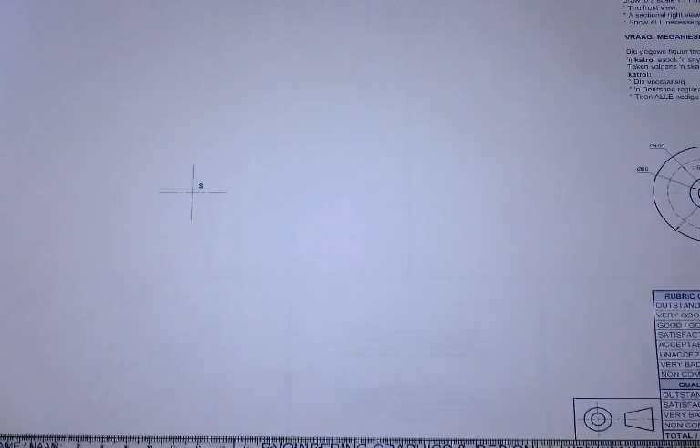Okay, so I'm going to take my compass and I'm going to look at... I just want to fit it so that you can just see my view here. I'm going to start with my front view first.

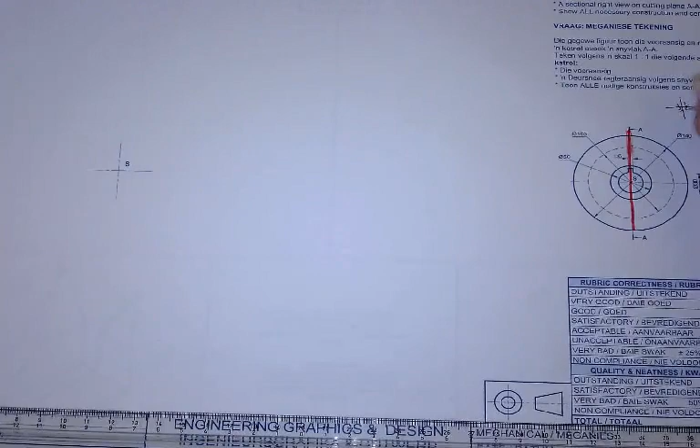So now, remember this is third angle. So when I look at third angle here, I have 1, 2, 3, 4 blocks. Front view is in the third block because it's called third angle. And then right is on the right, left is on the left. Okay?

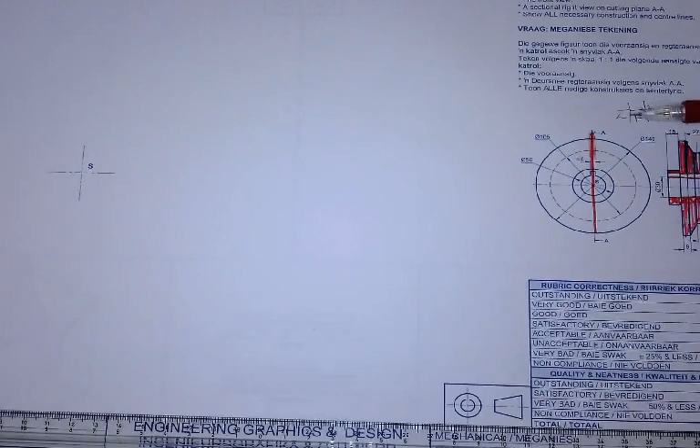When I have the front view here in my third block, this is my front view, okay, because they say a front and a right view. This view cannot be my front view because then that would have been a left view. Do you guys understand that? Okay, so please look at how you analyze your two different views so that you know which view is what.

So we are going to start off with this drawing, and now they say it's scale 1 to 1, but remember they are giving us diameters. So we have to halve those diameters to get the actual diameter when we draw it, because our compass draws in radii. So I'm looking firstly at this diameter here, because I'm looking at the arrow from there to there.

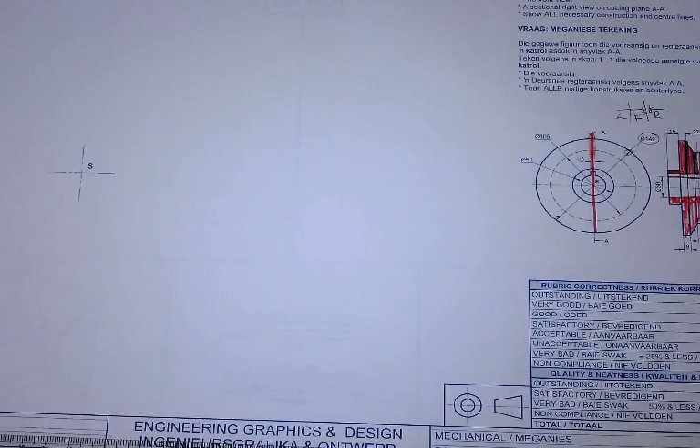Okay, so that's 140, so I'm going to set my compass on 70, which is half of 140. Set it on 70. Set it on S, because if you look at this view, S is right in the middle there, okay? So this S and that S is the same thing.

Okay, I'm not drawing here. Okay, hold on. Let me just zoom out a little bit more. Okay, there we go. That's better.

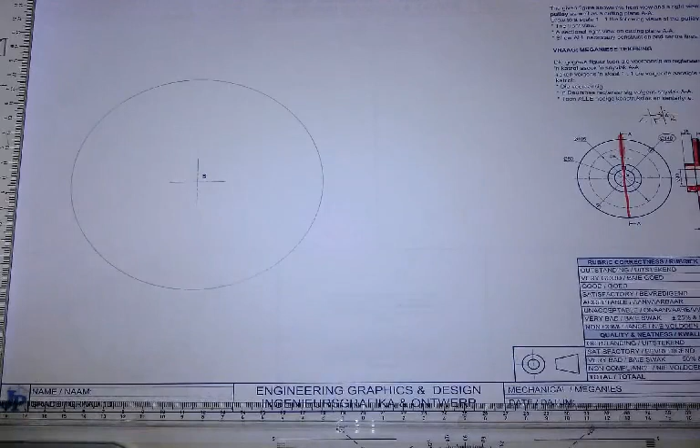And because this is a front view, I'm going to draw this in solid, because I can see that that line is solid. Then I go to my next circle, which is my hidden detail for this level of my pulley. Because when I project this across, I can see that these two align.

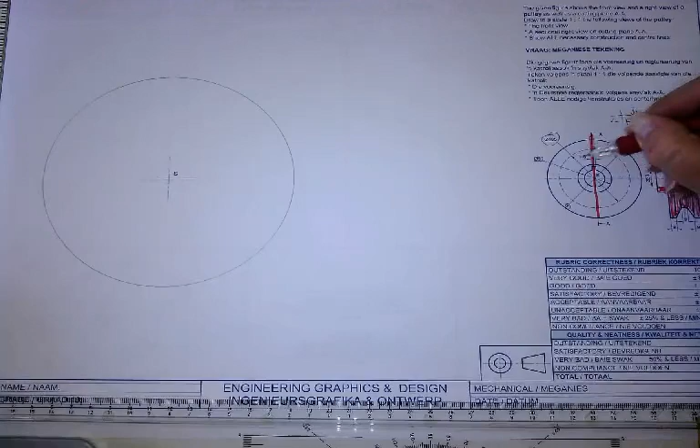So I'm teaching you now how to analyze your drawings as well. So I'm looking at that now, and this will be my 105. Okay, so what do we set our compass on? 52.5, hey? And remember, we can do half a mil.

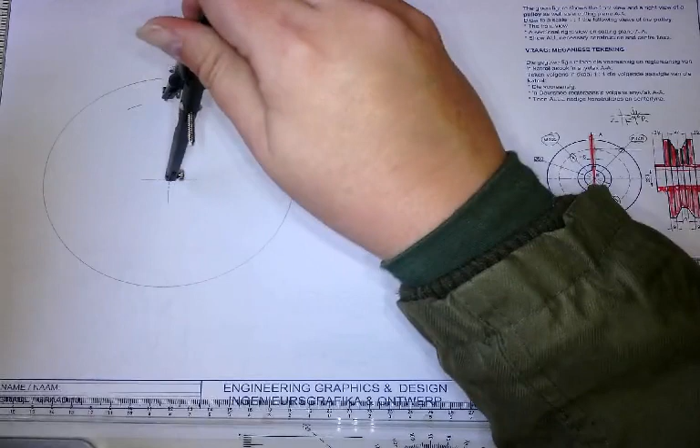Now you have two options on how to draw this. You can go like this, okay? Or you can draw a full circle and then erase in between, eh? Same thing, different story. Yes? You're fine.

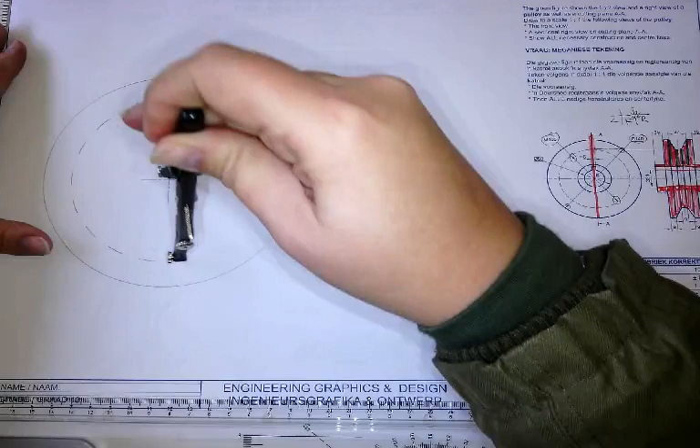Okay, so there's my hidden detail, all done, okay? And it stays hidden detail because it's hidden detail here on my view.

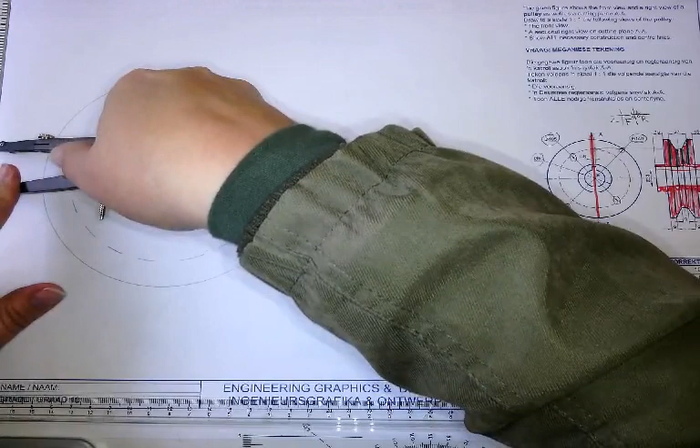Then I go to my inner circle, here, this one, it is 50. So I'm going to set my compass on 25. And please try and place your compass always in the same hole that you pricked on the middle, né?

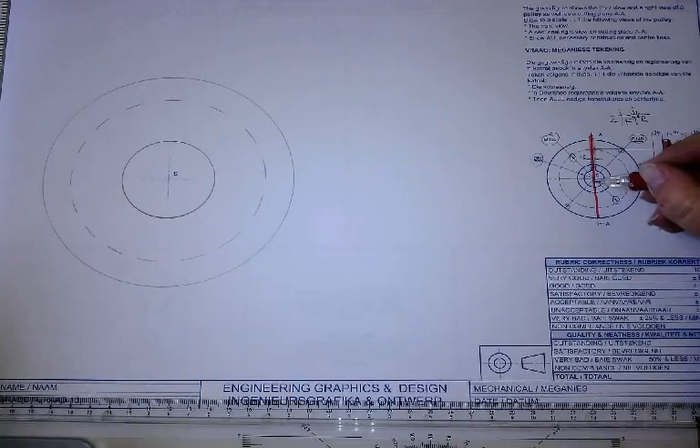And again, it's a solid circle. Then now the last one here is this internal circle here. That's basically where your shaft would go through for your pulley.

So that hole is where the shaft would go through of the pulley, and then we have the keyway there. So the dimension is not on our front view. So if you cannot find a dimension on your front view, you go to the opposite view or any of the other views and you go and look for the dimension there.

So here I can see that it is diameter 30. So I'm going to set my compass on 15. And I'm first going to draw it in construction because of the keyway. Okay? So I first draw it in construction because I still need to draw my keyway.

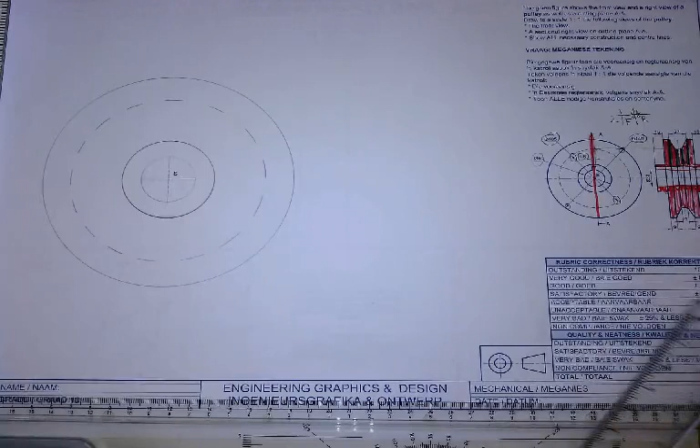So what I'm doing now is I'm going to check what is my keyway, and they show that here my keyway is 6 square, or square 6. So I'm going to go and I'm going to just first set my compass on 3 millimeters.

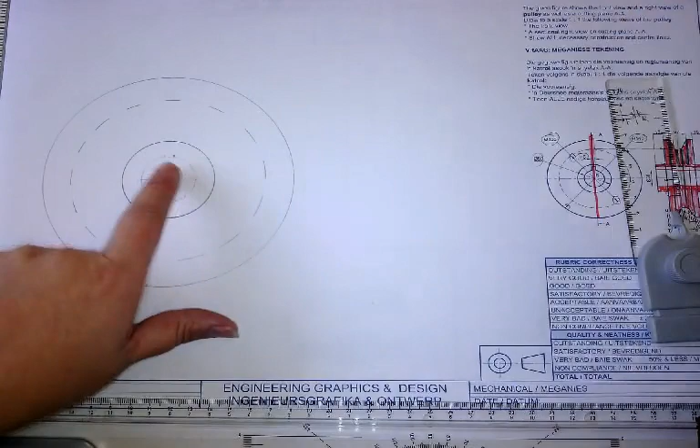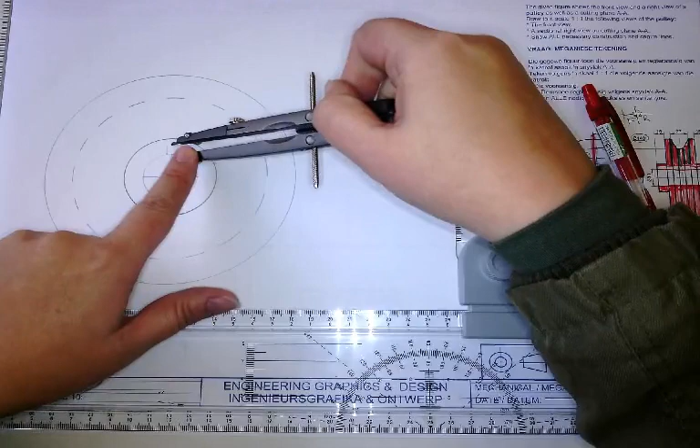And on my center line, here at the top of my circle, I'm going to scribe just 2 little dots. I don't do big marks there. I just do 2 little dots, and then I just do projection in construction, and then I set my compass on 6, to get my square.

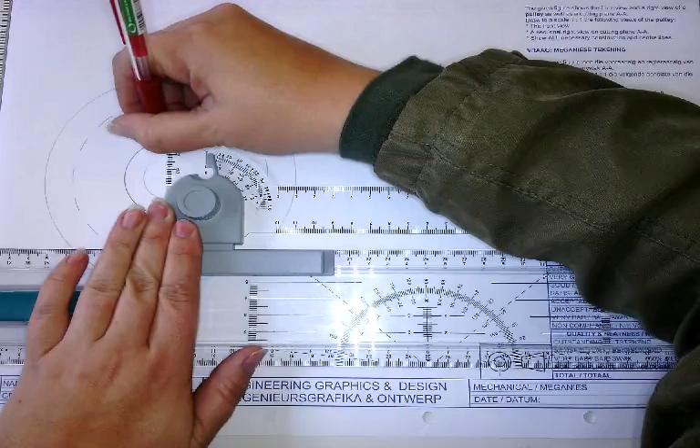Okay, and then I can go and draw my keyway in solid here. So my keyway is solid, and then I will go over my circle again to make it solid. And then our front view is done. So you see how easy that is, just to complete one view which consists of only circles.

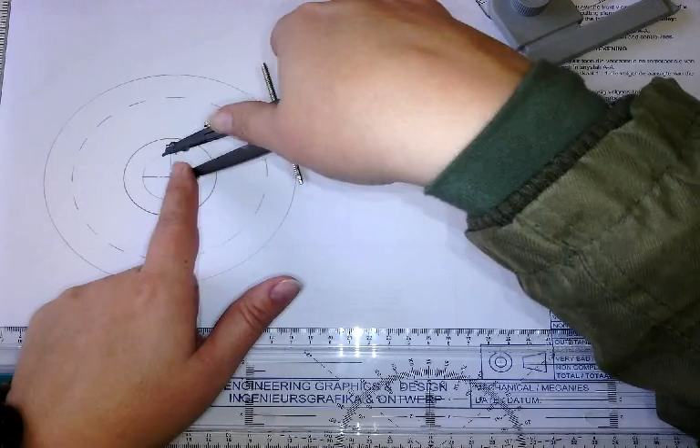And now remember, when you do your circle here, to not close it, so that part stays in construction. So there is my view done.

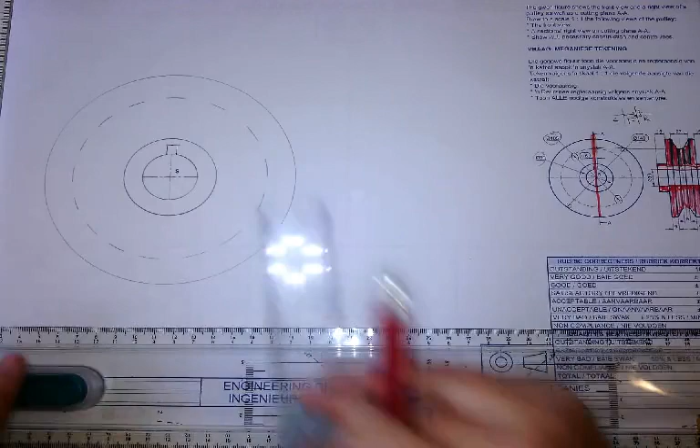Now I'm going to do my XY axis, or my major and minor axis, which is center lines. And the vertical axis is the cutting plane. We have to indicate the cutting plane, so I'm just drawing my center lines here.

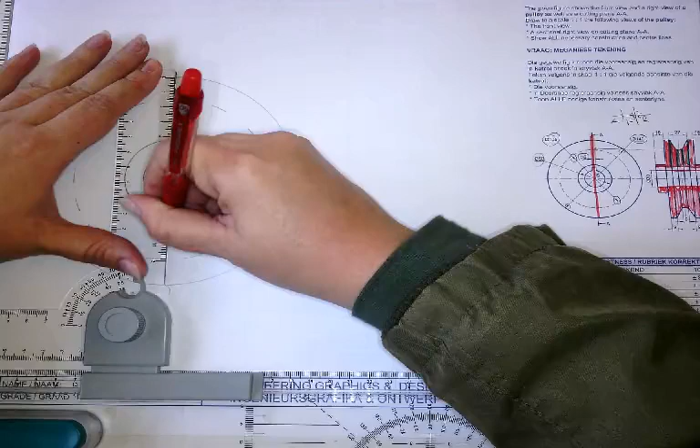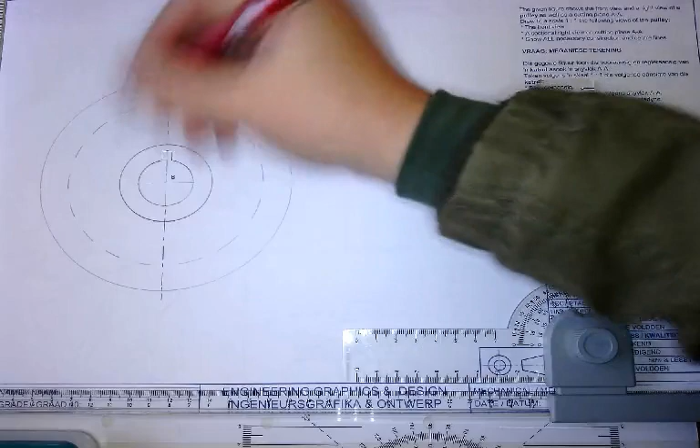And then what I'm doing here at the end, I'm doing a very dark line. The same at the bottom, a very dark line, and you literally just add your arrows. The arrows are pointing from the view to the side that you're looking at. So we are looking from the right, we are looking at the right hand side, and we label it section A-A.

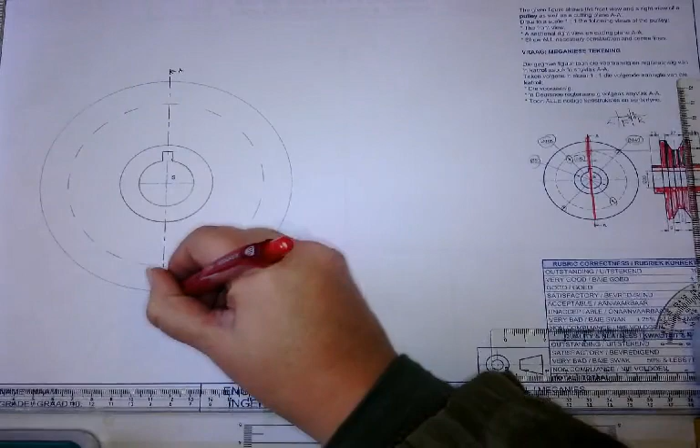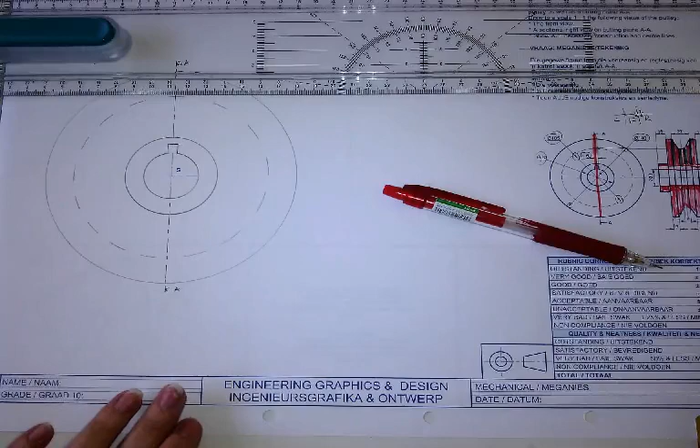And then I'm going to project, and I'm going to find now my right view, and I basically have all the dimensions except all the widths. So we're doing projection to our right view.

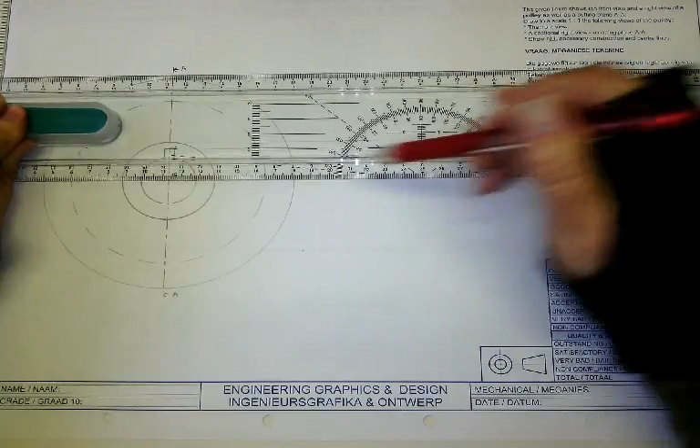I will also project my center line. So basically what I do with my center line, because it stays a center line, I will project it through to my right view, I'm working on the right view, as a center line. I just said left view, sorry about that, it's supposed to be your right view.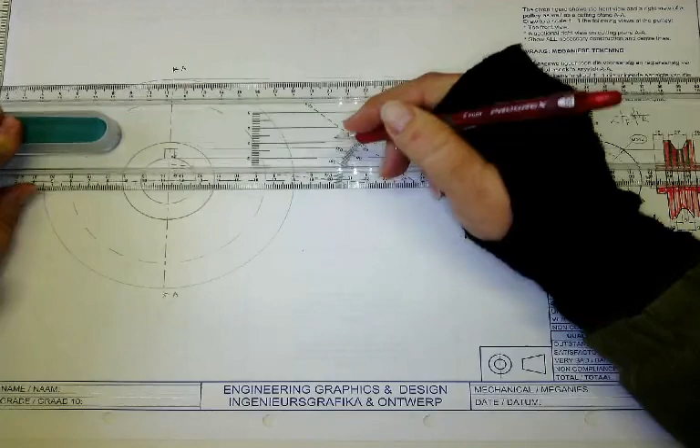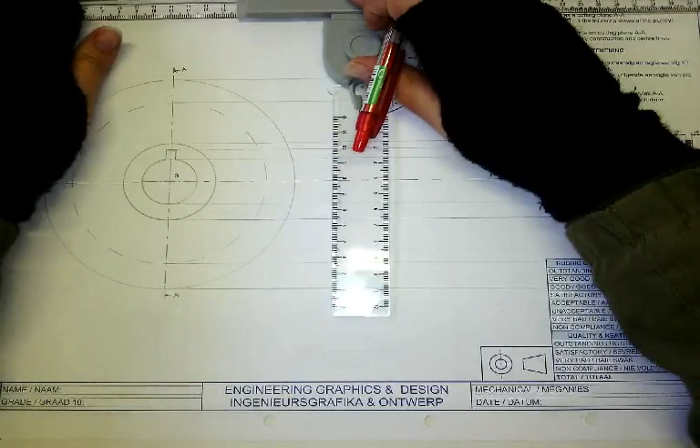Okay, so now what I'm looking at is I just need to find a place to start my drawing on. So you know now with the previous drawings that we did, you guys had to just do a 10 millimeter division with that circle. Now they haven't divided your page.

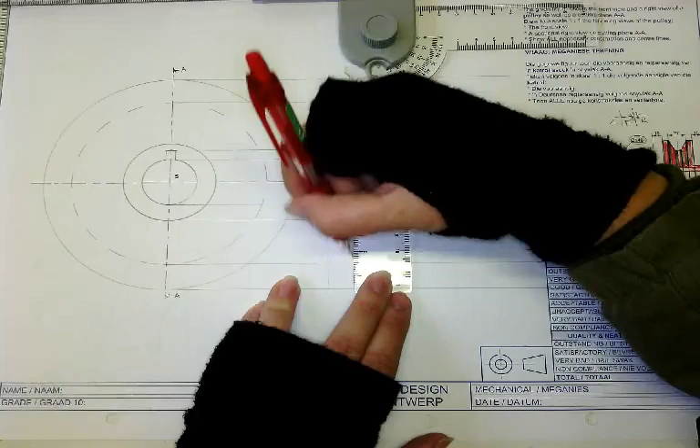So I'm just checking my distance here, and I'm just seeing that it is more than the actual drawing. And I'm drawing a dividing line for myself, and then I'm doing about more or less the same distance, and I'm just drawing another line for myself, and this is now going to be basically this edge of my drawing here. Okay, so now I can go and I can do my dimensions.

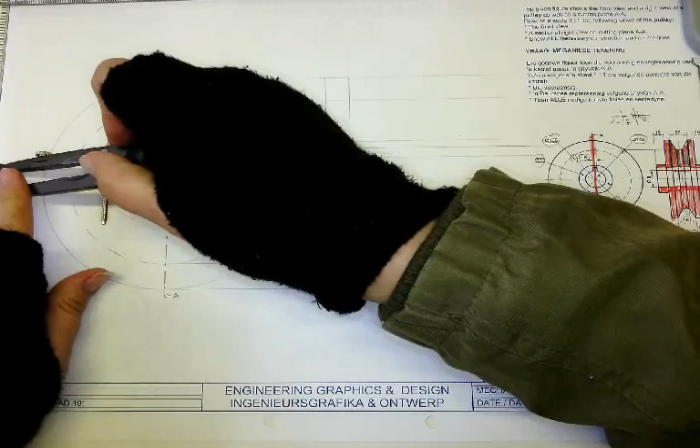So what I'm looking at is I'm going to dimension first my 15 that I'm seeing there. So I'm going to set my dimensions on 15. And from the edge here, doesn't really matter where you scribe. I'm going to try and scribe on the actual lines that I'm working on. So there's one there because I'm looking at this dimension that I'm seeing there.

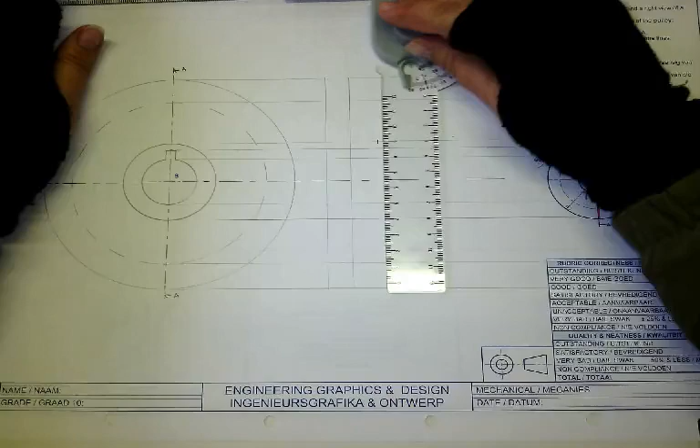Okay, so I have my 15 and then I want to project my 15 millimeters now actually from the bottom to the top. That is what I want to do, and this will all be in construction. Nothing will be solid lines yet. Everything will first be in construction.

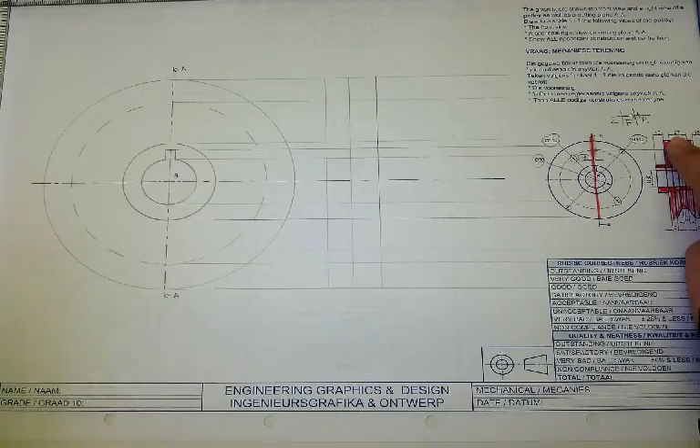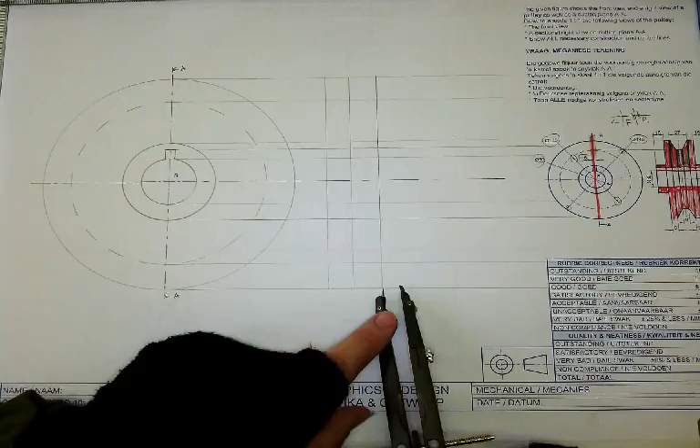Then I'm looking at my next dimension is 9. Then I'll go to 27 and 9 again, and while I'm busy with that 9, I will do this mid 9 here as well, after I've found the center of my drawing. So I'm just going to set my compass on 9 millimeters. And then from here now, I will be scribing from the bottom. I do my 9, then I'm going to set it on the 27. So from the 9, I'll scribe my 27, and then 9 again.

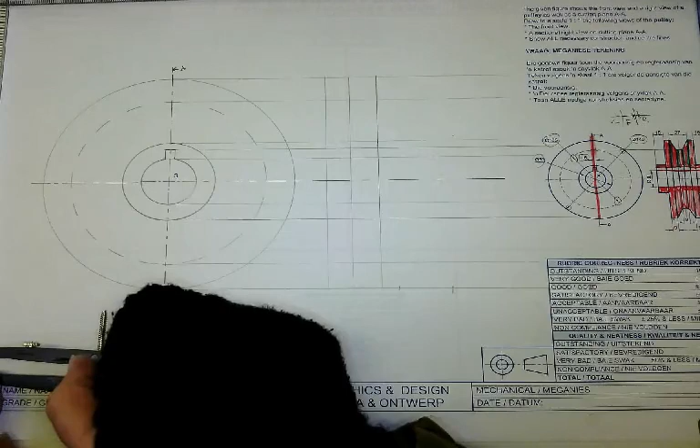And then I will project this last line first to the top. That will be the first one that I want to take to the top, because that will be the end of my pulley. And then I'm going to measure 15 again if I'm looking at my last dimension here on the side.

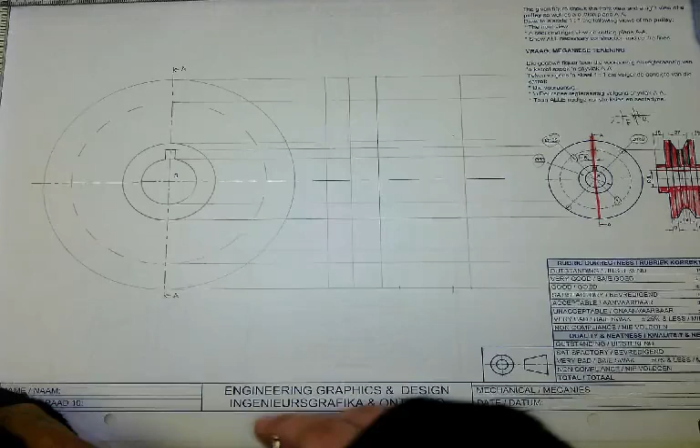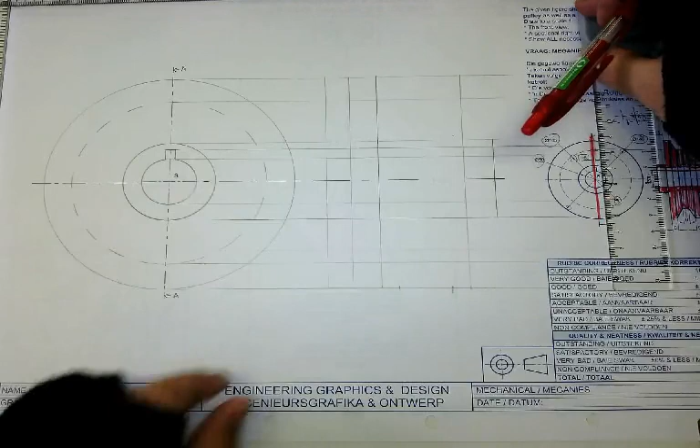15, and I'll just scribe it here on the center line. That's my 15, and I will just close that line, so when I look at it I can see that it is right from the top of my circle here until the bottom of my circle there when I'm looking at this view here. Okay, so now I have to find the middle here.

So basically, to find the middle, very easy, we just do a bisection. So there's an arc and an arc. I will draw my line through the middle there of the arc where the arcs intersect.

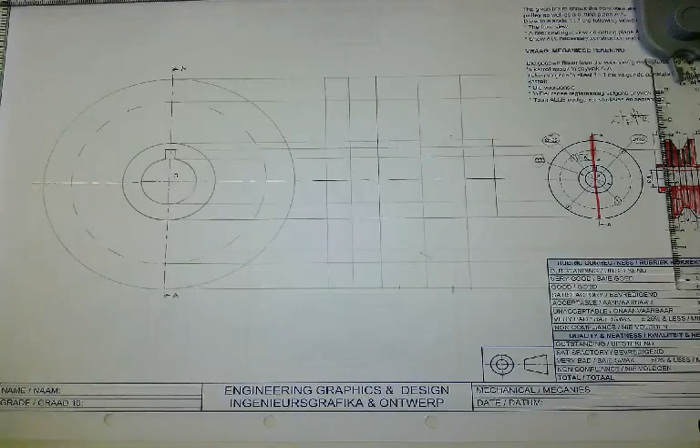So that's my midpoint, and then half of 9 is 4.5. So 4.5 mils to each side there and there, and then I basically have all my dimensions that I needed to actually now complete my drawing. So I will project this, all the lines now, to the top, because I am going to use them now on both sides of my pulley.

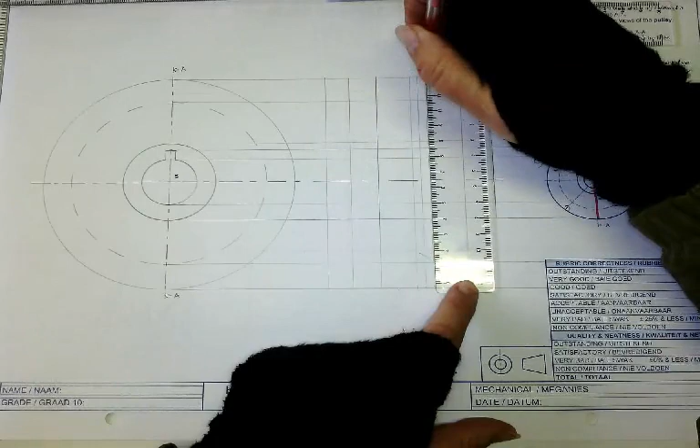So there, and that one. Now when we start with this drawing, we're not going to do it little bit by little bit. We're basically first going to trace the outline of the drawing, because our view is cut.

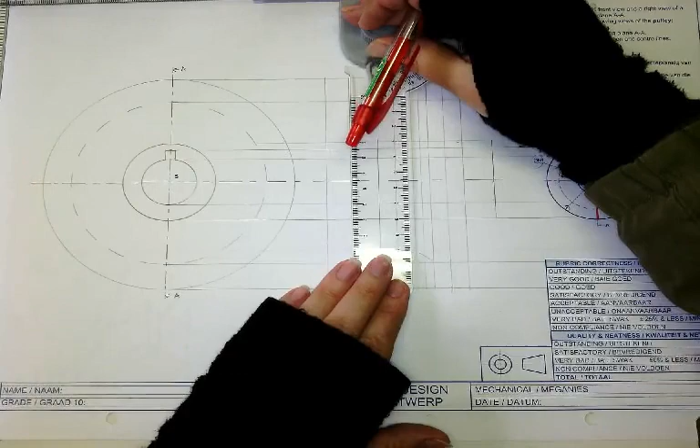Okay, so I'm starting here. I know that's a solid line, and I know this is a solid line. Then looking at this view, just check where your lines end and trace the edges of your drawing there, and the same on this side.

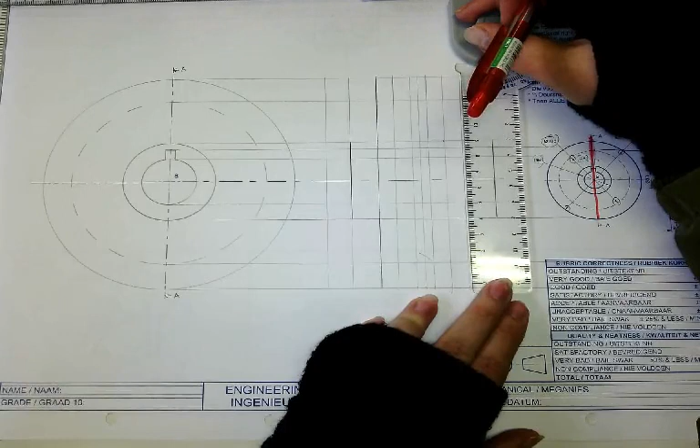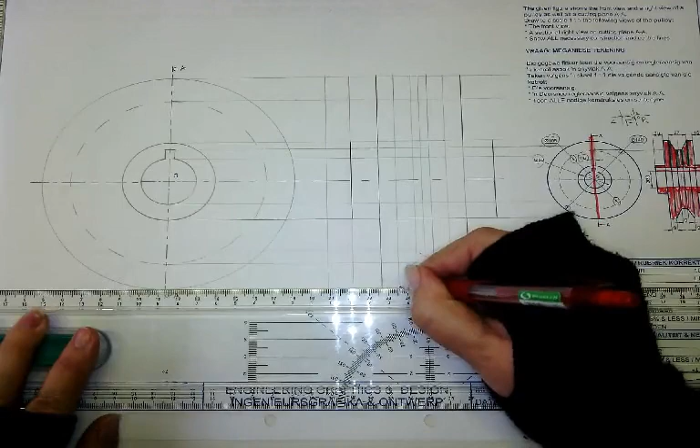Remember, a pulley looks the same on one side as on the other side. So there, okay, so now basically I have done most of my horizontal lines that I wanted for getting my pulley. Then I'm going to check, I want to do this lip for basically where the pulley belt will fit in, there, and then here this in the middle, going to the top here, there.

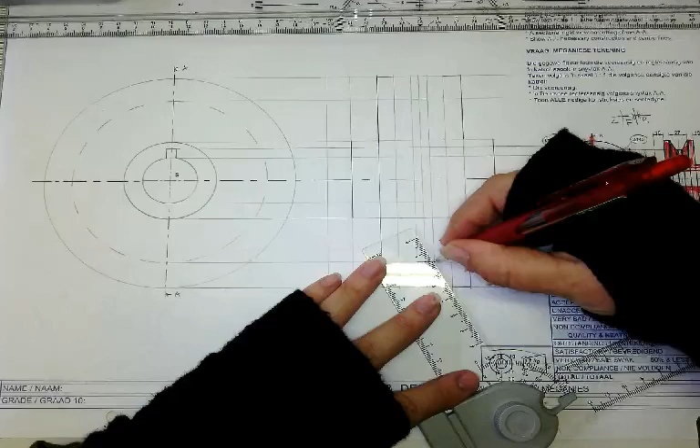And there, and then these lines are on an angle of just connecting the one point to the other point. So there, and there, and there, and there. Okay, so I'm connecting those lines on there.

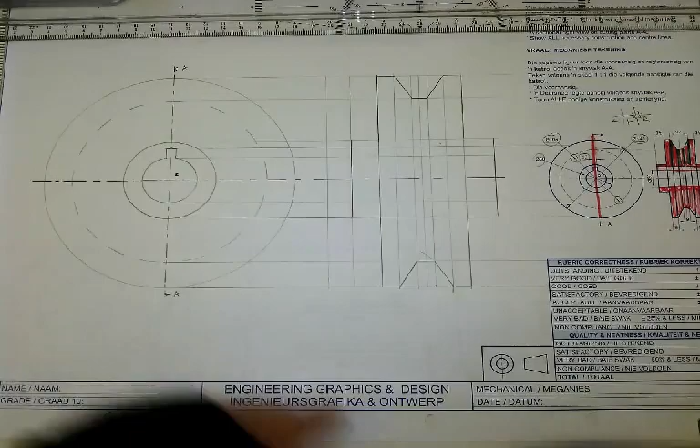Okay, and then I will connect these points there, horizontally, here, and there. And then I need to draw in my keyway.

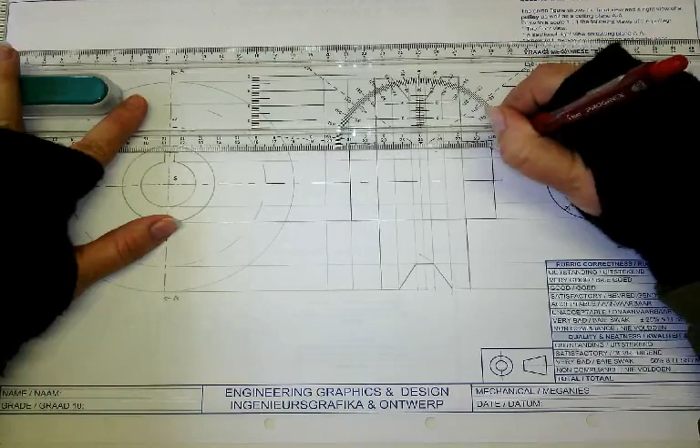So for my keyway, when I looked at that, when I explained to you guys, those lines are straight lines and a straight line there. And we have a straight line there. Okay, so now basically our drawing is done.

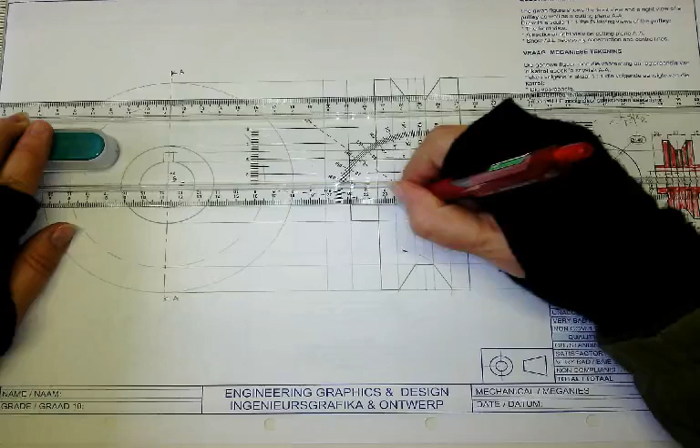We just have to do hatching. Now hatching is done on a 45-degree angle. So I will set my set square on a 45-degree angle. And the way that you're going to work with this is you are going to work into your drawing.

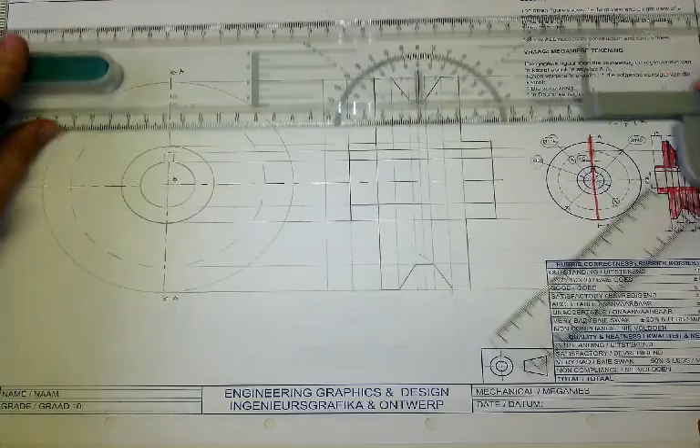So this is quite a big component that I am working with. So the larger the component is, the further the hatching can be apart. The smaller the component is, the closer the hatching can be.

So what I do is I put a point in the corner here of my actual drawing. I can see through my set square. So then I'm going to draw a line. Then I'm going to move my set square to the same point that I was using and draw a line.

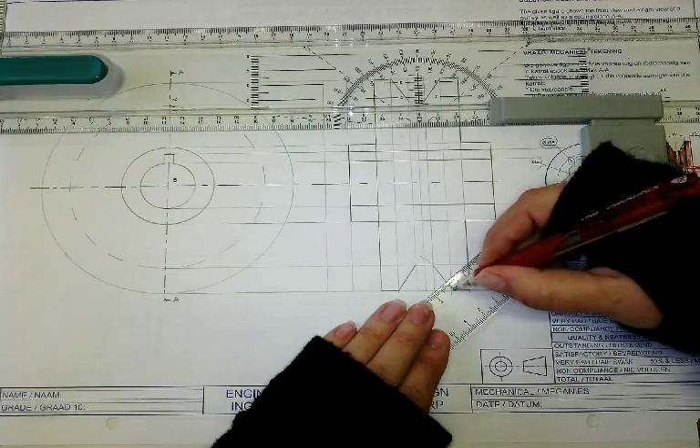So this is almost like the sliding method that I taught you guys with the division of a line segment, which we've done in the beginning of the year. So there, and you see I continue through my drawing.

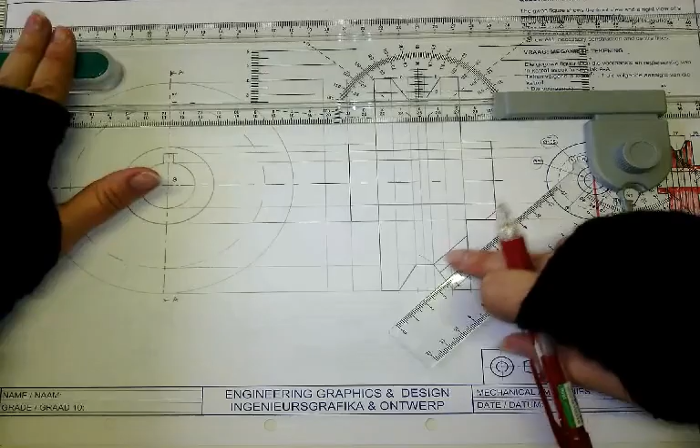So now I'm just moving my board ruler up to the top. There. And there. Okay, so I am drawing my hatching very dark because I want you guys to actually see the hatching.

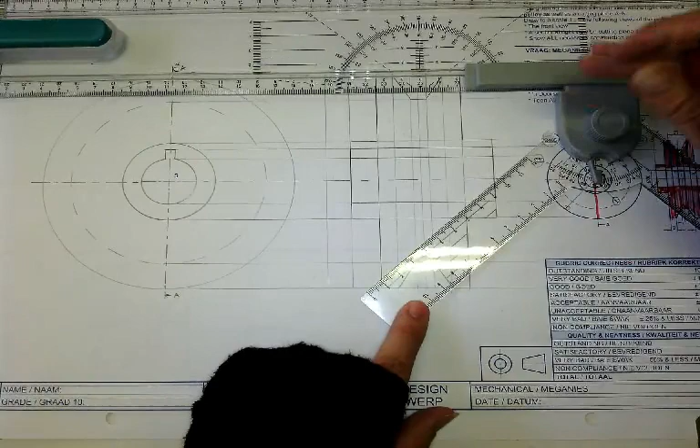With your hatching, it's supposed to be a B line. So your actual drawing will be an A line outside. And then for your hatching, you are going to draw your hatching as a B line. In the coming drawings that we're going to do, I will draw those lines lighter. I just really want you guys to see how I am using my set squares to do a drawing's hatching.

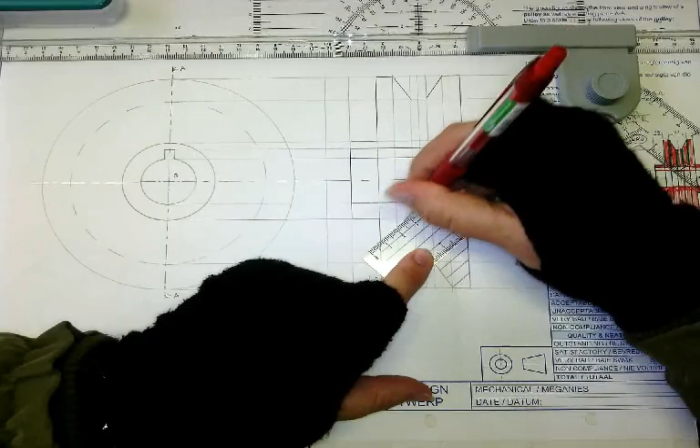When you do your hatching, please make sure that your lines touch the edges of your drawing. If it does not, at the end of the day, just go over your drawing and make sure that your hatching does not go over a line but just touches the line.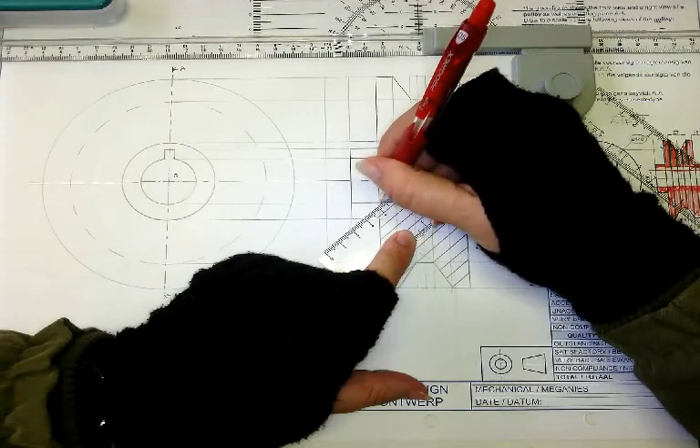And please see that I am skipping my keyway. I am not drawing over my keyway because the keyway is actually a cavity. That is a change in depth, and that is why we are seeing the line the way that we are seeing it.

Okay, I'm just going to swap my set square around, and I will still be following the same procedure of just putting my set square on the lines that I was working with.

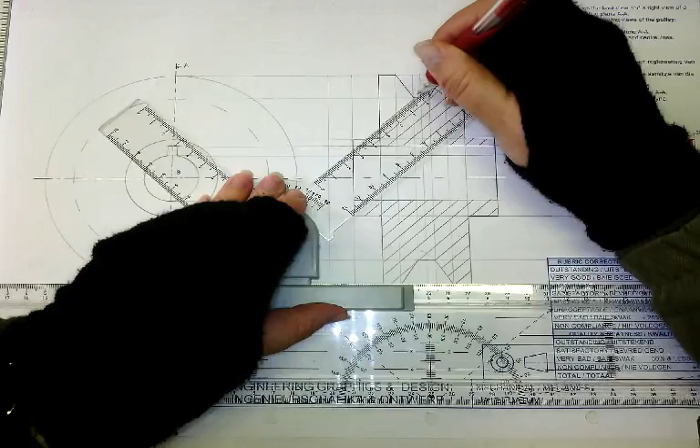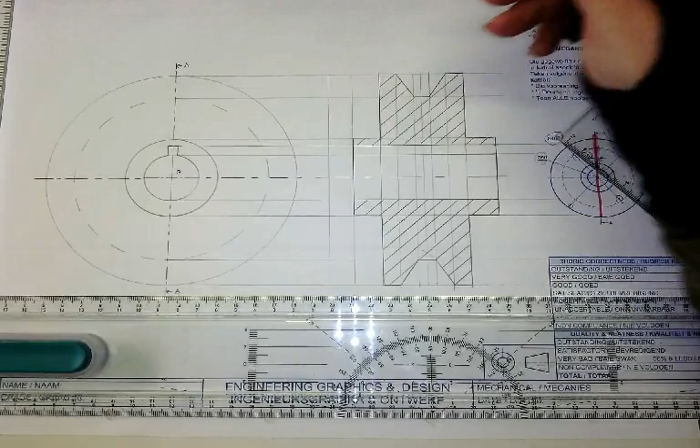Okay, so you see here my lines aren't touching properly, so I'll just go over this afterwards and make sure that it is correct. Okay, so then just afterwards, always please remember to read your question. And they say there's no dimensioning required, so I will not do any dimensioning.